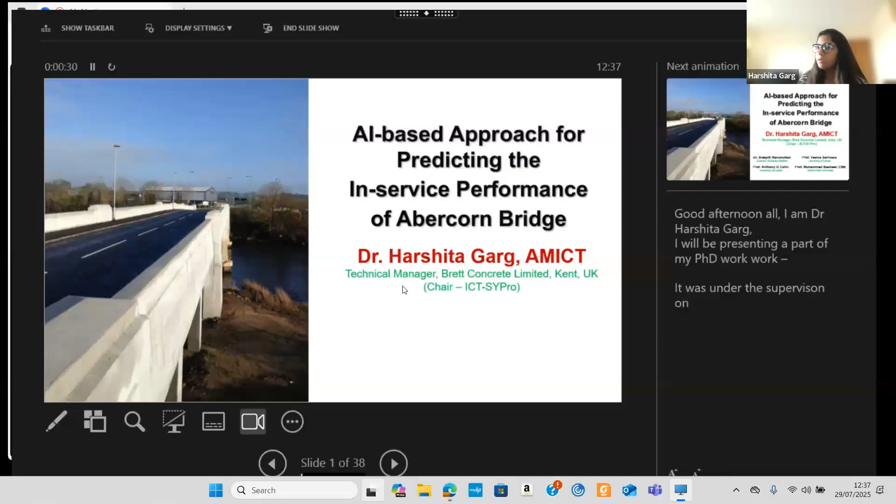My name is Dr. Harshita Garg. I'm technical manager at Brett Concrete, also the chair of ICT-SYPro, as Anita has mentioned. Today, I will be presenting a part of my PhD work, which is an automated artificial intelligence-based approach for predicting the in-service performance of Abercorn Bridge. It was under the supervision of Dr. Srijit from Queen's University Belfast, Professor Vasilis and Professor Anthony Cohn from Leeds University, and Professor Mohammad Bashir from Heriot-Watt University. Let me begin by saying that if you can predict it, you can prevent it.

And that's the rationale behind structural health monitoring. So what is actually structural health monitoring?

So it's an innovative technology that automatically senses, provides, and evaluates timely information on physical and chemical changes in materials that could allow early detection of deterioration, such as chloride-induced corrosion.

So basically, we have sensors such as electrical resistance sensors, temperature sensors, relative humidity sensors that are embedded in the concrete or concrete structures. The data from these sensors goes to the data acquisition system, which stores the data remotely on remote desktops.

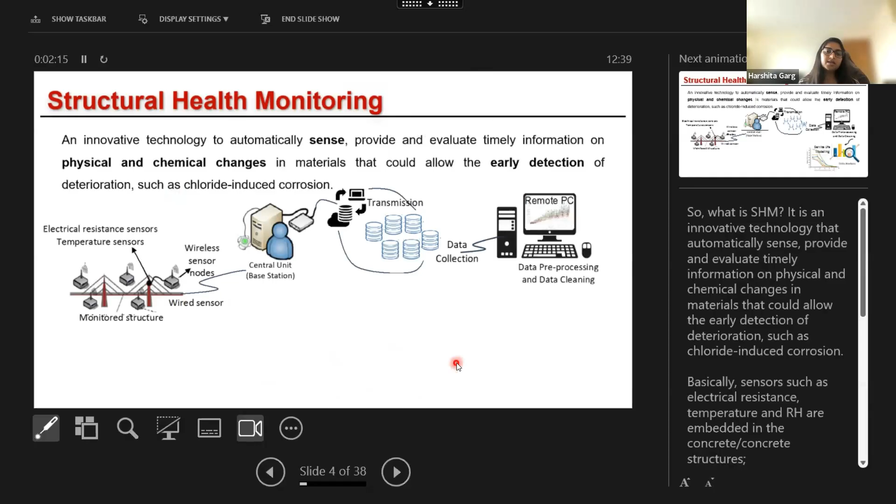And the data can be then pre-processed and cleaned for analysis. And the data analysis could provide us timely information about the faults in the structures, which can help for decision making, planning, and maintenance strategies. Therefore, it leads to real-time maintenance, increased serviceability, and improved safety of the structure and the environment.

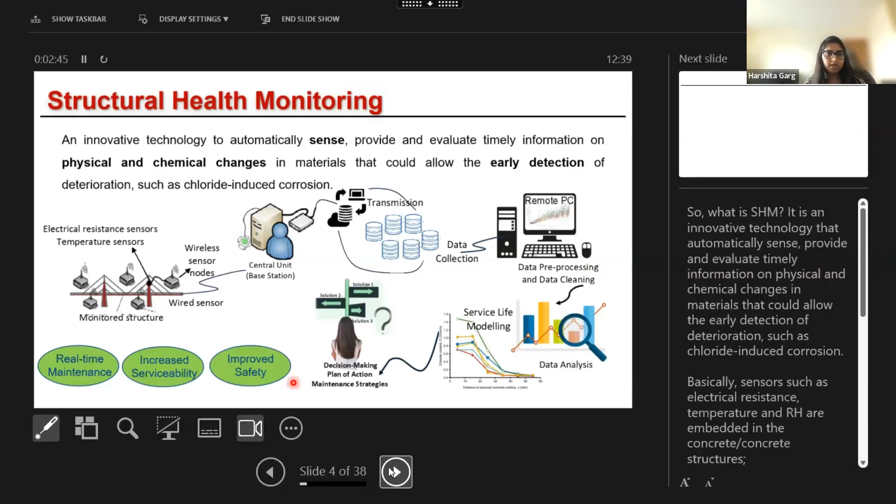While global SHM has been in use and people know about its benefits and potential applications, the local structure health monitoring for durability is still not the predominant practice in the maintenance management of structures. But why?

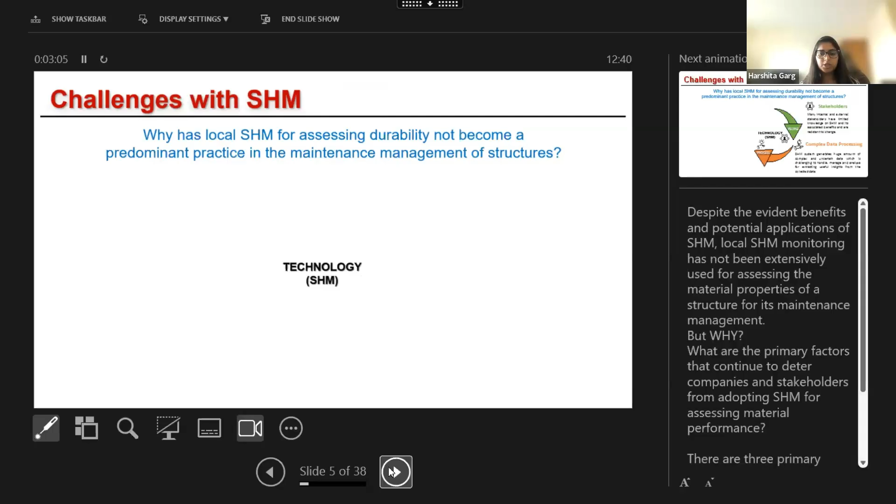What are the factors which lead companies and stakeholders to not adopt SHM? So there are three primary factors, the first of which is stakeholders. Not all stakeholders have knowledge about structure health monitoring and its associated benefits, and therefore they are reluctant to any changes.

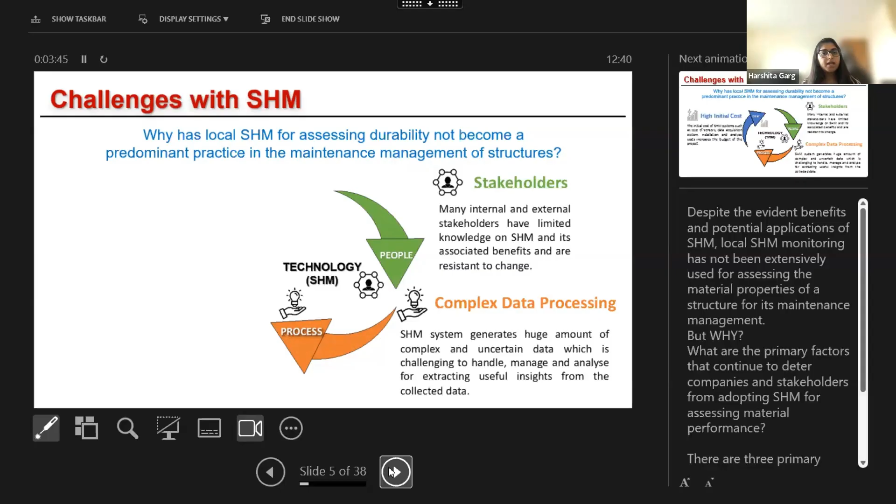Secondly, even if they know about SHM and implement those sensors in the structure, these sensors generate a huge amount of data, which is difficult to analyze and maintain, and therefore they cannot get useful information from this collected dataset. Finally, the cost of these sensors increases the overall budget of the project. So these three are the factors which prevent stakeholders from using sensors.

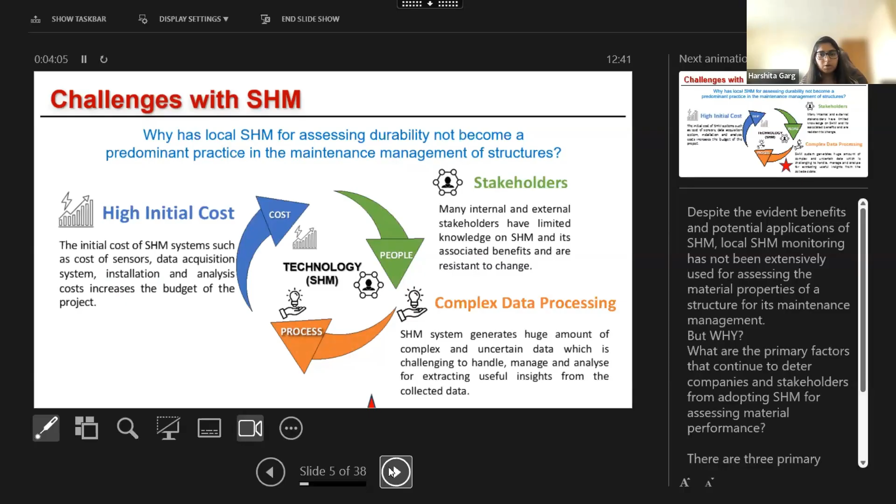In this presentation, I'm focusing on one of the topics here, which is complex data processing, which indirectly serves the other two as well: the sensor data dilemma.

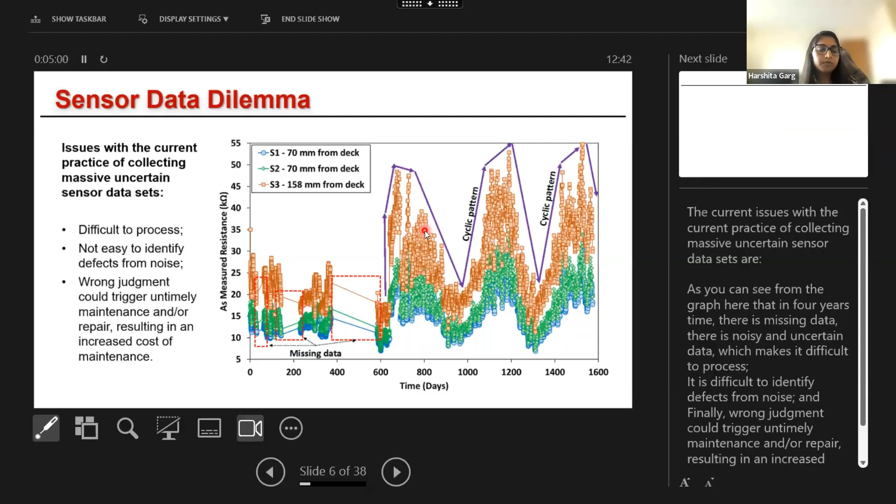This makes it difficult to process. It is also not easy to identify what are actually defects from this noise. Finally, if you derive wrong information from the dataset, that could lead to wrong judgment and therefore untimely maintenance and repairs, which could eventually increase the cost of maintenance and defeat the purpose of using the sensors. So therefore, this needs some solutions.

The three potential solutions that were identified were: first, to develop an AI-based SHM methodology that could resolve any issues related to data processing. Second, to conduct whole life cost analysis of concrete bridges with various SHM systems for durability over a specific period, and therefore eliminate any cost-related issues.

The two of these can then assist decision makers in making decisions about repairs and maintenance, and therefore eliminate any barriers preventing the widespread adoption of SHM.

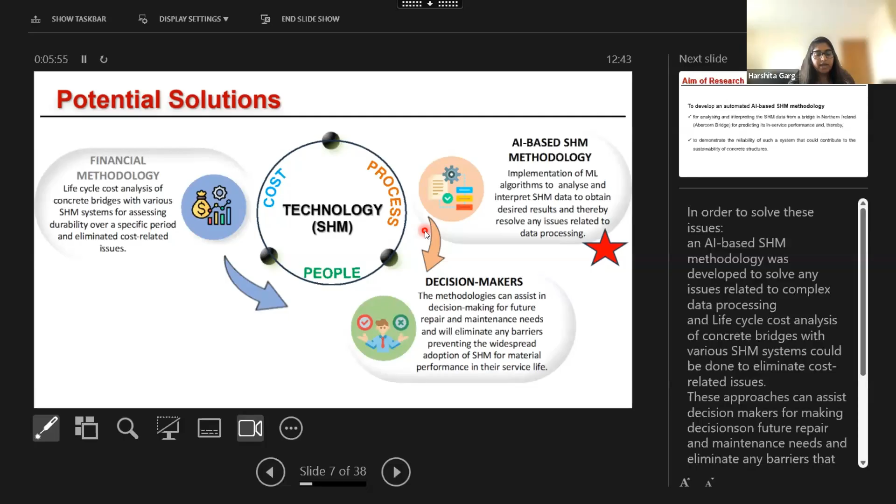So in this presentation, I will only be discussing one of the solutions, the AI-based SHM methodology that I developed. The aim of the research was to develop an automated AI-based SHM methodology for analyzing and interpreting the SHM data from a bridge in Northern Ireland, the Abercorn Bridge, for predicting its in-service performance, and therefore to demonstrate the reliability of such a system that could contribute to the sustainability of concrete structures.

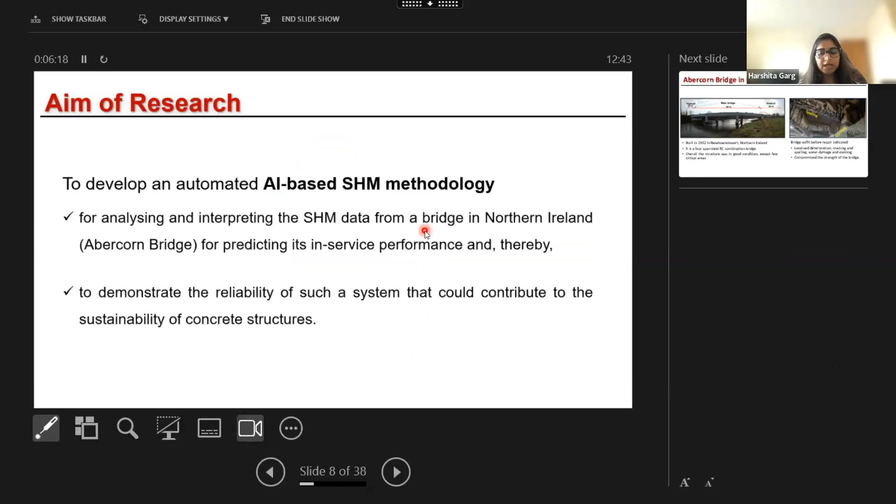Abercorn Bridge was built in 1932 in Northern Ireland. It's a four-span steel and reinforced concrete combination bridge. Overall, this bridge was in good condition, but over time, it started to show signs of localized deterioration, such as cracking and spalling of concrete, which exposed the reinforcing steel.

There was also evidence of water damage and staining from all the exposed areas, which led to compromising the strength of the bridge.

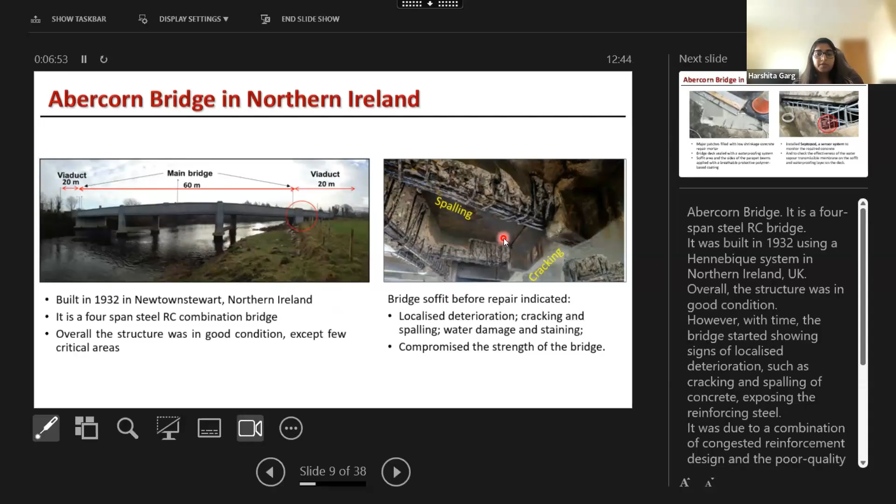So therefore, the bridge was repaired and the major patches were filled with low shrinkage concrete repair mortar. Along with that, the bridge deck was sealed with a waterproofing layer, while the soffit area and sides of the parapet beams were applied with a breathable protective polymer-based coating so that it allows moisture to evaporate.

In addition to that, during the repairs, 3 commercially available sensors called septopods, as seen here, were installed. The aim behind installing these sensors was to check the effectiveness of the water vapor transmissible membrane on the soffit and the waterproofing layer on the deck surface, and also to see the rate of chloride ingress in the concrete.

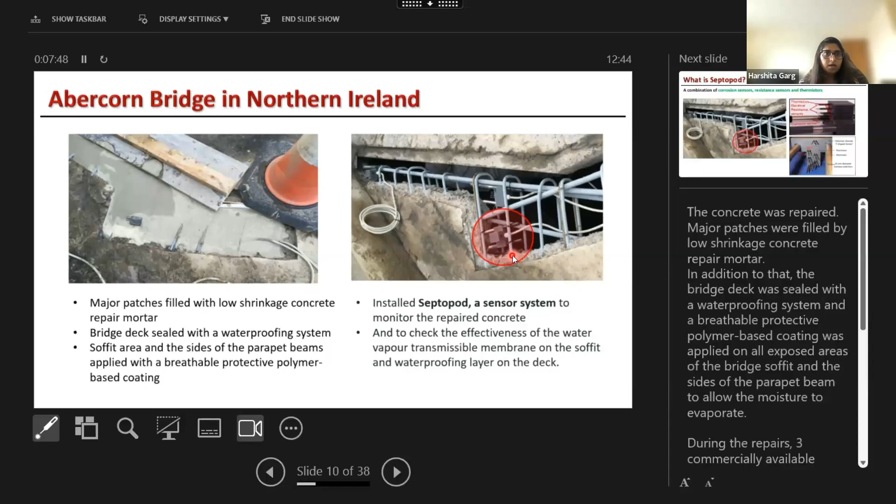So what is actually the septopod? The septopod is a combination of 3 types of sensors: corrosion sensors, resistance sensors which are electrodes, and temperature sensors which are called thermistors. The set of these 3 sensors is called a septopod.

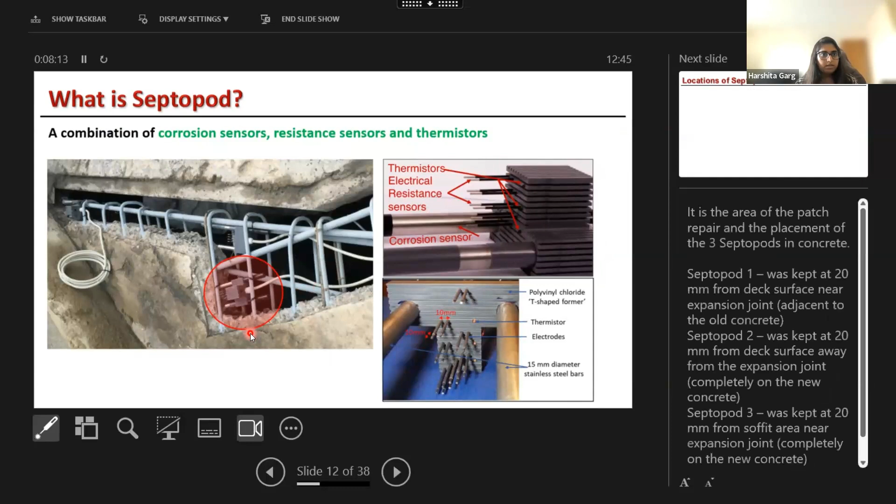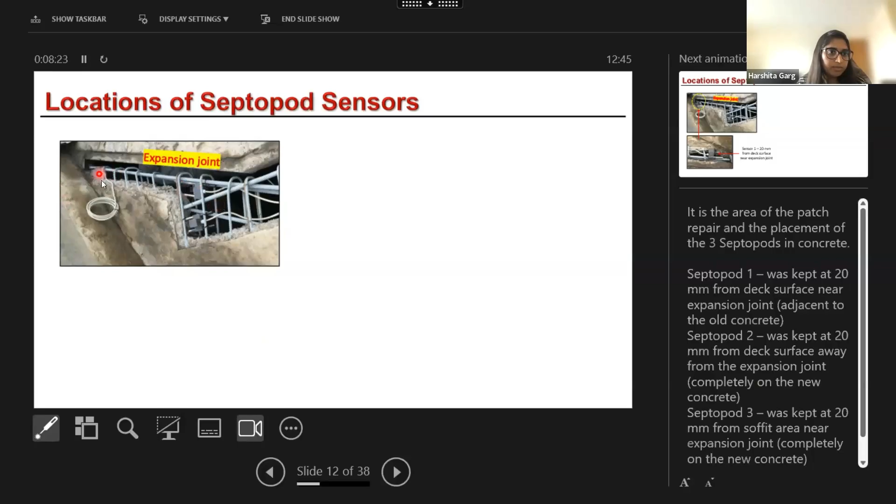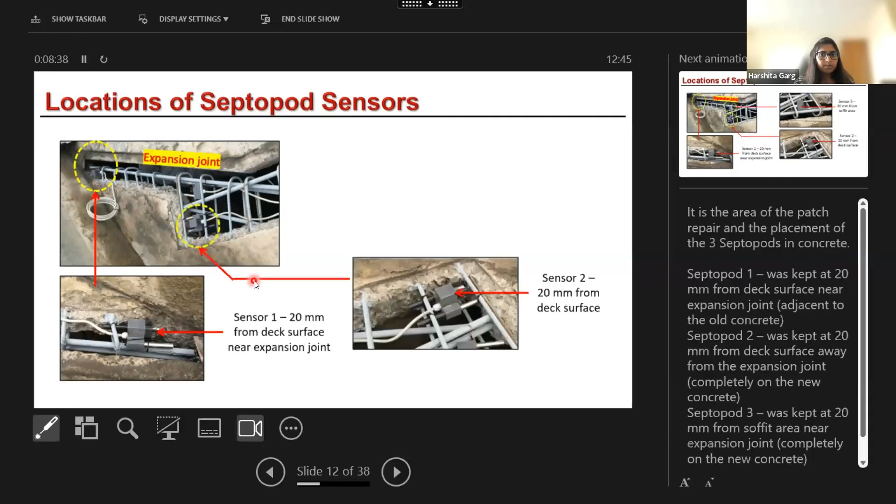These sensors were located at 3 different depths at 3 different locations in the concrete. These are the 3 septopods here. The first one was placed at 20 mm from the deck surface near the expansion joint, adjacent to the old concrete. The second one was placed near the deck surface, 20 mm from the deck surface, but away from the expansion joint. The third one was placed at 20 mm from the soffit area.

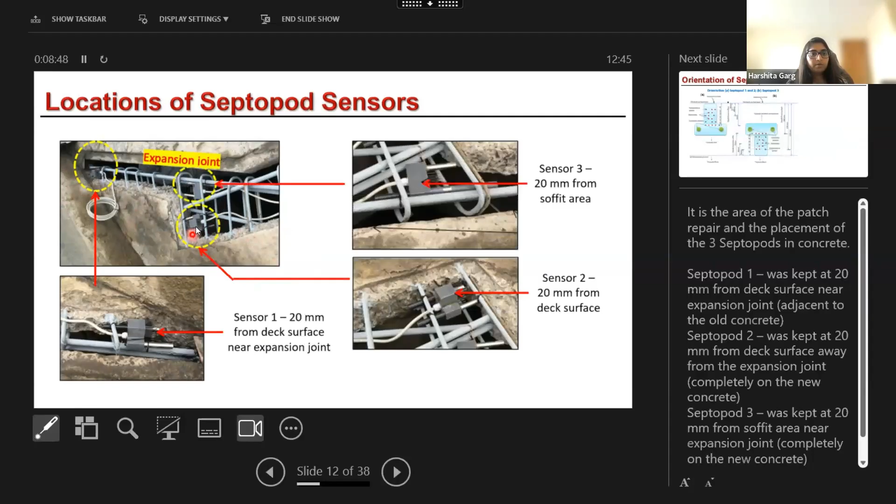The orientation of these 3 sensors: the first 2 were 20 mil from the deck surface, and the third one is 108 mil from the deck surface. Each septopod has 6 electrodes at 6 different locations and 3 temperature sensors.

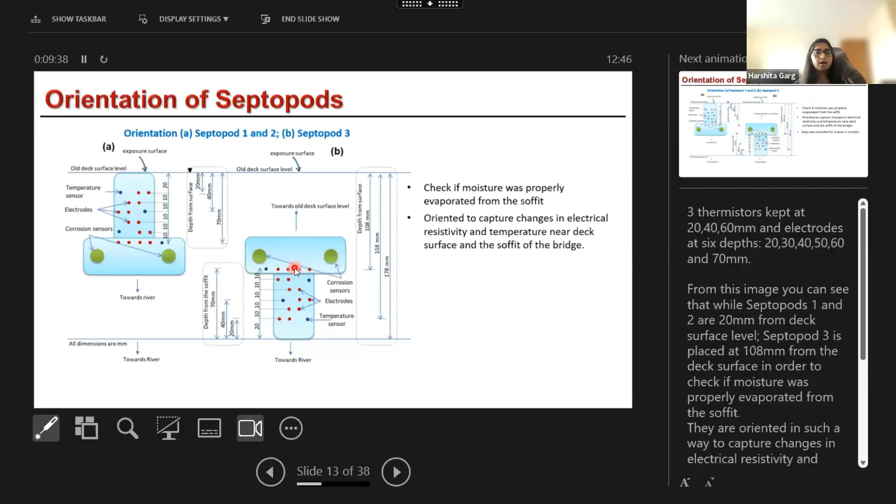The first 2 were oriented to capture changes in resistance and temperature near the deck surface and the soffit of the bridge, while the third septopod was specifically placed near the soffit to check if moisture was properly evaporating from that area. The sensors were capturing data for over 4 years.

We were collecting data every 2 hours for the first 20 months. For the remaining 30 months, data was collected twice a day, at 12 a.m. and 12 p.m., every day.

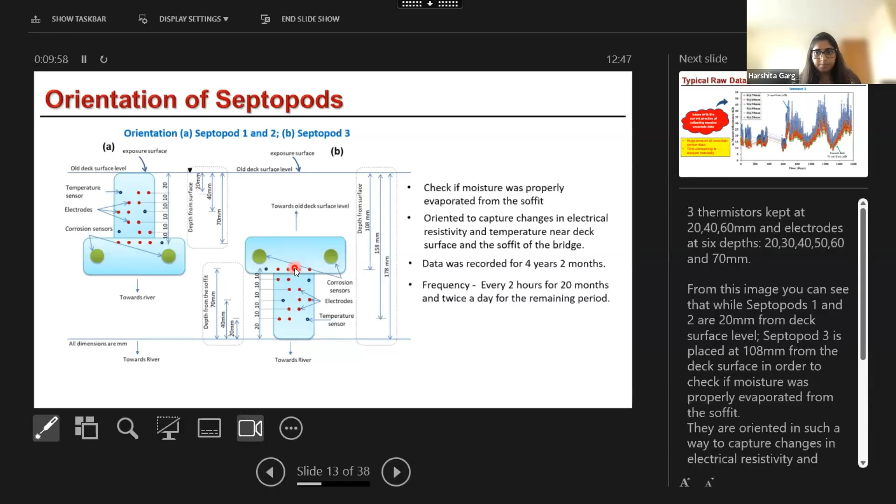So this is the original data that we got, the raw typical data of electrical resistance. You can see there is missing data, the single lines, and here the data is going up and down. There's uncertainty in the data.

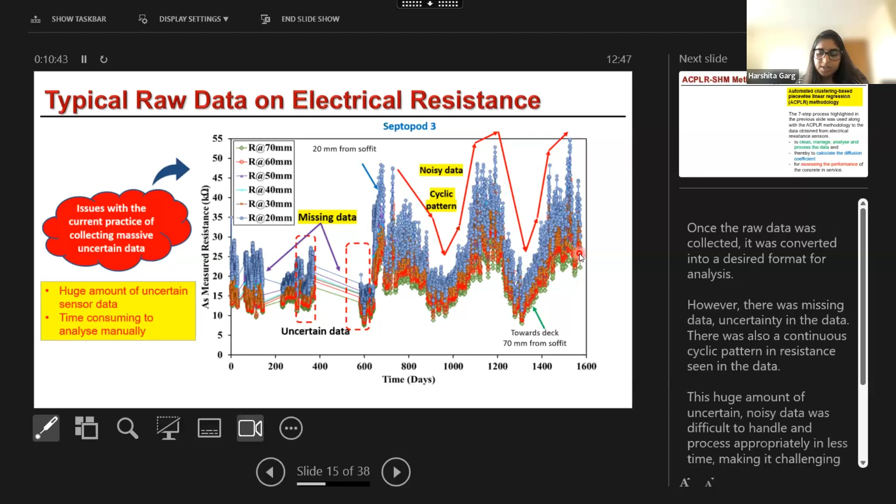There's cyclic patterns, and the data itself is huge, making it difficult and time consuming to manually analyze. All this led to the use of algorithms which could help process it easily and efficiently.

To analyze this data, an automated clustering-based linear regression was used. It is an amalgamation of two algorithms. This methodology combines two types of algorithms: one is unsupervised learning called clustering, and the second is regression called segmented regression.

This methodology is a 7-step process. The first step is to collect all the sensor data from resistance, temperature, and ambient conditions. The second is to clean the data, pre-process it, reduce noise, and identify missing information - basically identify all the general trends in the data.

The third step is to quantitatively analyze the data using two algorithms called k-means clustering and segmented regression. The results from these two algorithms could be used to calculate the diffusion coefficient, which is enough to assess the performance of concrete structures. It can also be used in any service life model like Duracrete, Life 365, or ClinConc to predict the remaining service life of the concrete.

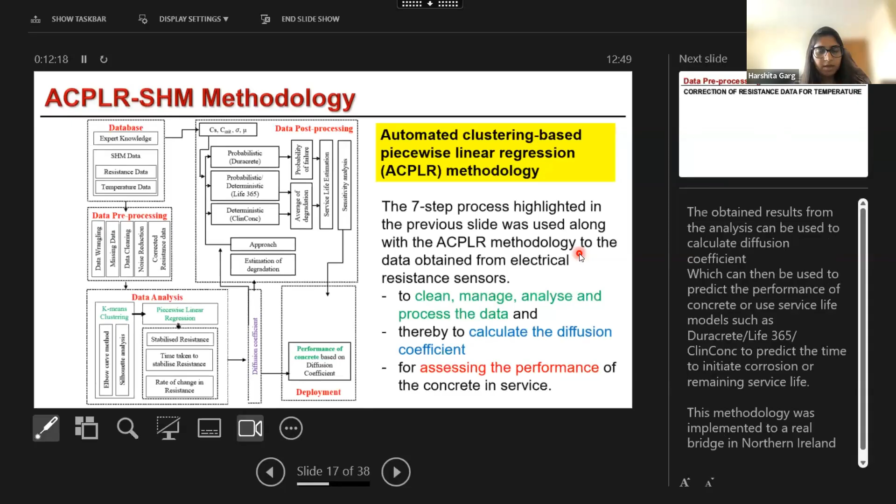I will now discuss all these steps using the sensor data we got from the Abercorn bridge. The next step was to pre-process the data, and as we can see, there was huge cyclic variation in the 4 years of data.

This is mostly because resistance measurements are directly affected by environmental conditions. Here you can see that with an increase in temperature, there's a sudden drop in resistance. Due to this, an Arrhenius relationship was used, which reduces the influence of temperature on electrical resistance and standardizes it to 25 degrees Celsius.

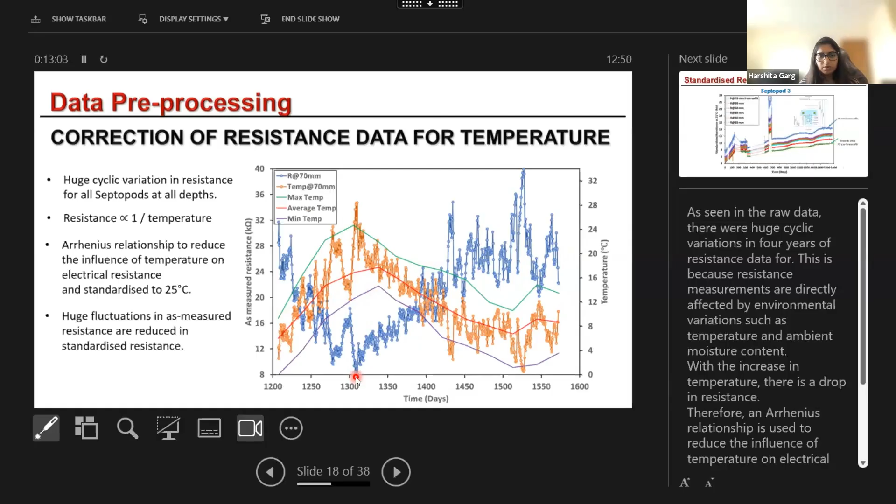Now the huge variations we saw in the previous slide are reduced, and this can be seen in Septopod 3. Those huge variations are now showing that the resistance is overall increasing rather than such varied sensor data.

Even though the resistance data is increasing overall, there is some variation - the resistance was increasing, then suddenly there was a drop. This drop was identified from the sensor data, and on visual inspection it was identified that there was leakage in the structure, in the newly repaired concrete near the expansion joint. This repair was done soon after identification, and after that we can see the resistance started to increase again. Even though there is some missing information, we can see resistance was overall increasing.

Then there was a sudden increase in resistance, the reason for which is still unknown, but there were two major possibilities identified. First, during this time there was a change in the frequency of data collection - from every 2 hours to twice a day - which could have messed up the system, giving inappropriate results. Also, local areas nearby on the bridge were heated up to get rid of excess moisture, which could also have led to an increase in resistance, but the actual reason was unknown.

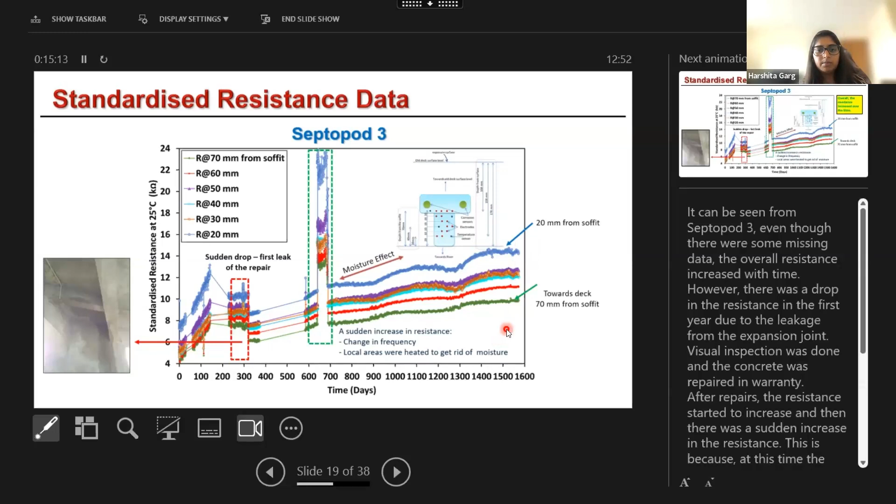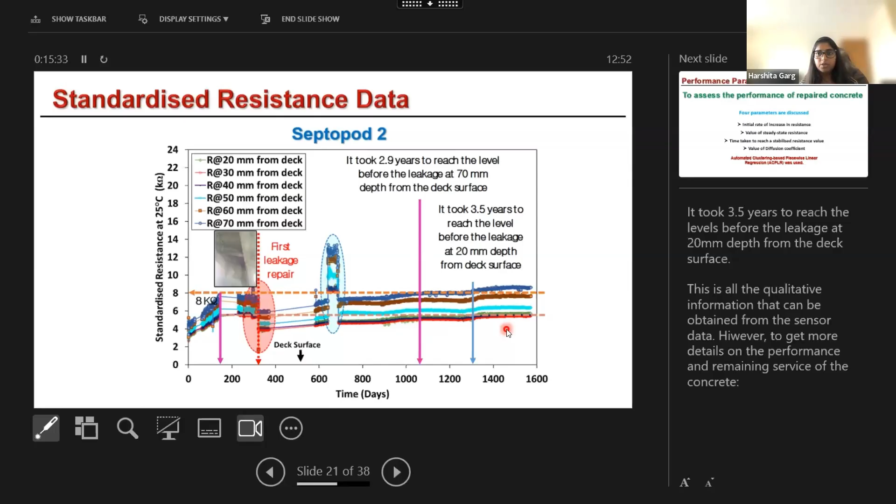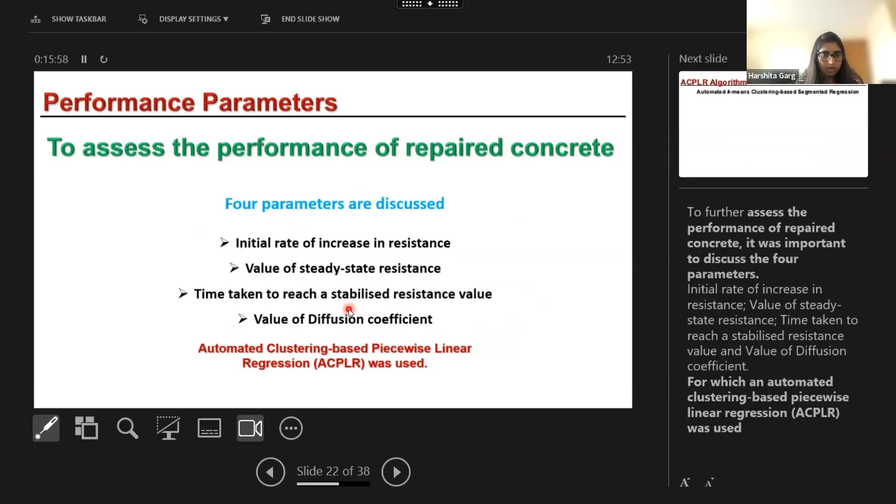This is all the information we can get from pre-processing the data, which is qualitative. Similar data was obtained from Septopod 1 and Septopod 2. But in order to get further information about the performance of concrete and remaining service life, we need to quantitatively analyze this data, for which we need 4 different parameters: initial rate of increase in resistance, value of steady state resistance, time taken to reach the steady state resistance value, and finally the value of diffusion coefficient. All these 4 parameters can help assess the performance of repaired concrete, using an AI-based algorithm called automated clustering-based piecewise linear regression.

I'm going to discuss this algorithm on one of the data sets we got from the sensors. Since the resistance data was overall increasing, I took the continuous data set after 650 days, after 2 disparities we found, because this was the continuous data for the next remaining 2 years. So this is the data at 70 mil from the soffit area.

Here we have the variable standardized resistance. If you look at the data set here, it looks like the data is divided into around 5 clusters, or 4 breakpoints. It can be seen here - it is divided into 5 clusters or 4 breakpoints.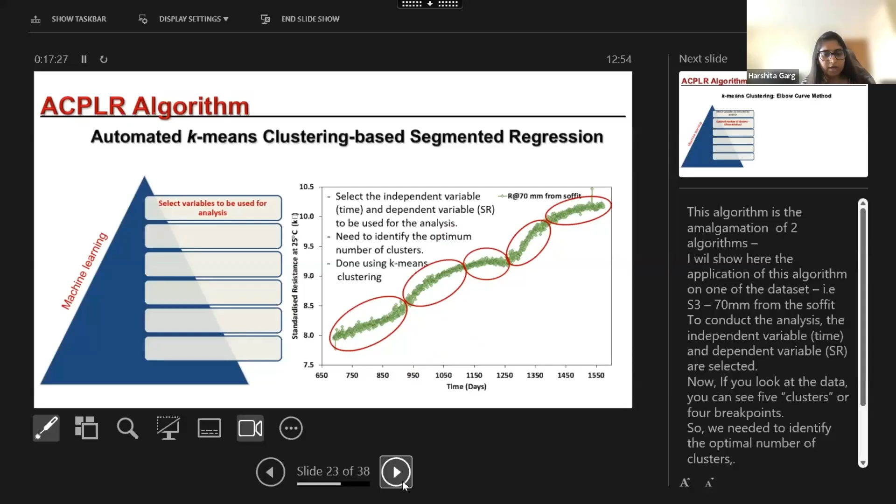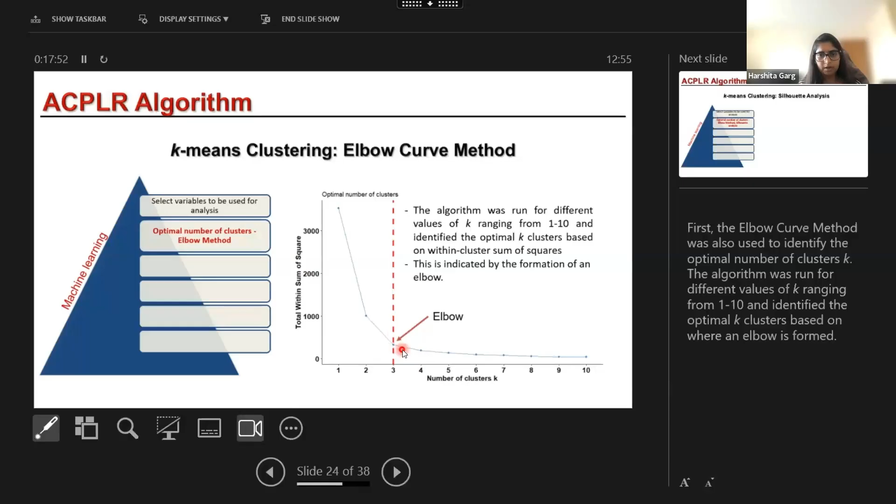But how do we know at what location these clusters are, or how many of these clusters are optimal? To find that, we use the k-means clustering algorithm, which has a method called the elbow curve method that identifies the optimal number of clusters. The algorithm runs for different values of k from 1 to 10, and based on within-cluster sum of squares, it identifies the value of k clusters. Where there is an elbow formed, as seen here, it shows the optimal number of clusters - so there are 3 clusters.

Now, to cross validate it, we use a second method of clustering called silhouette analysis. This method identifies how similar a data point is within the cluster compared with other clusters, and how well each data point fits into the assigned cluster. Based on this, the highest silhouette coefficient is considered as the number of clusters required. Keep in mind, it's not the correct number of clusters - it is only the optimal number, not the exact number that could be identified.

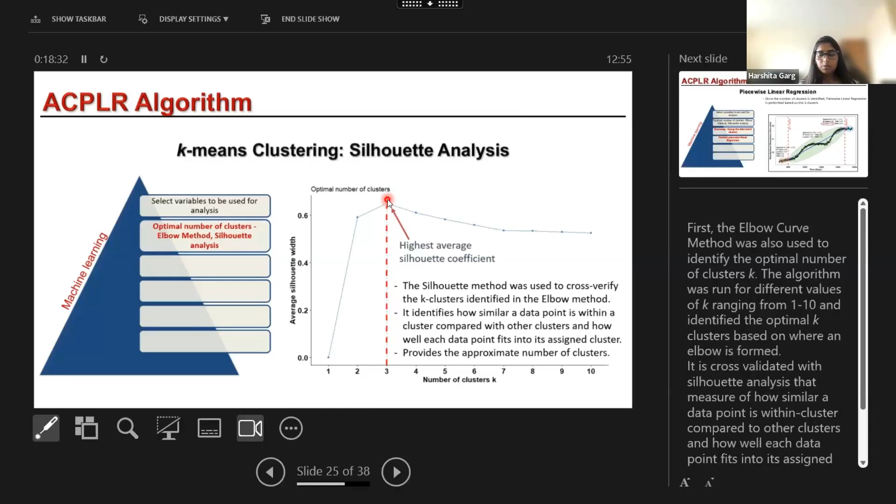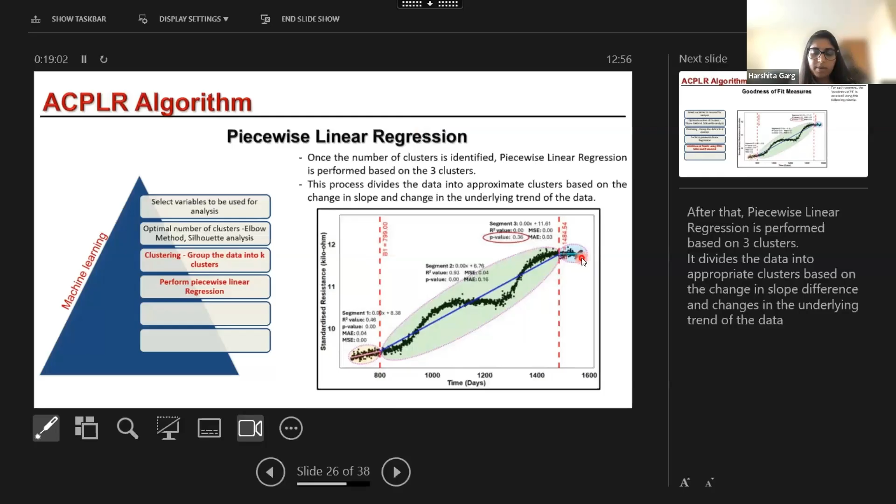So the next step is to run the algorithm with clustering and piecewise linear regression. It identifies 3 different clusters at 3 locations, dividing the data based on a change in the slope and change in the underlying trend of the data. Here we can see it provided 3 clusters, but this doesn't seem to look correct by looking at the data. So there is a need to put a statistical method in place and adjust some criteria - if it passes those 4 or 5 criteria, then the clustering results are okay.

The 4 criteria that were set: first, if the R squared value is greater than 0 for all the segments. Second, the P value is less than 0.05, meaning time has a significant impact on the resistance. Third, the mean squared error and mean absolute error values are closer to 0, signifying higher accuracy for the segments identified. The last criteria is that these 2 values, MSE and MAE, have no significant difference.

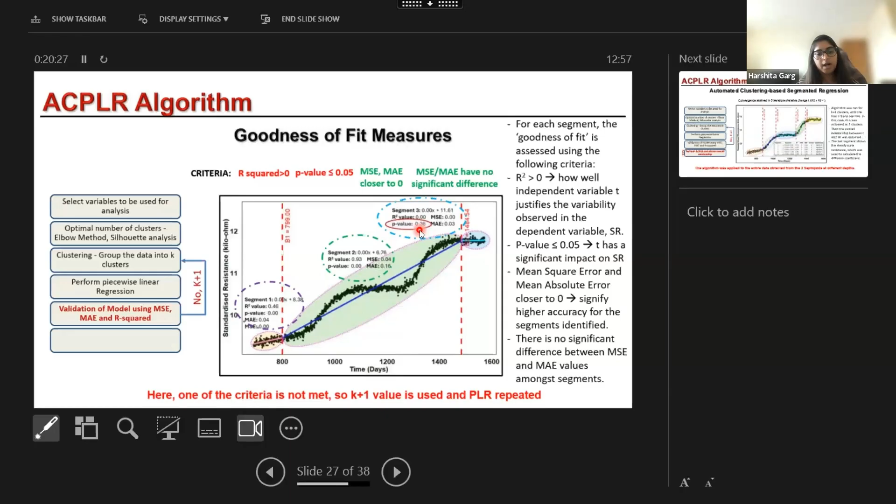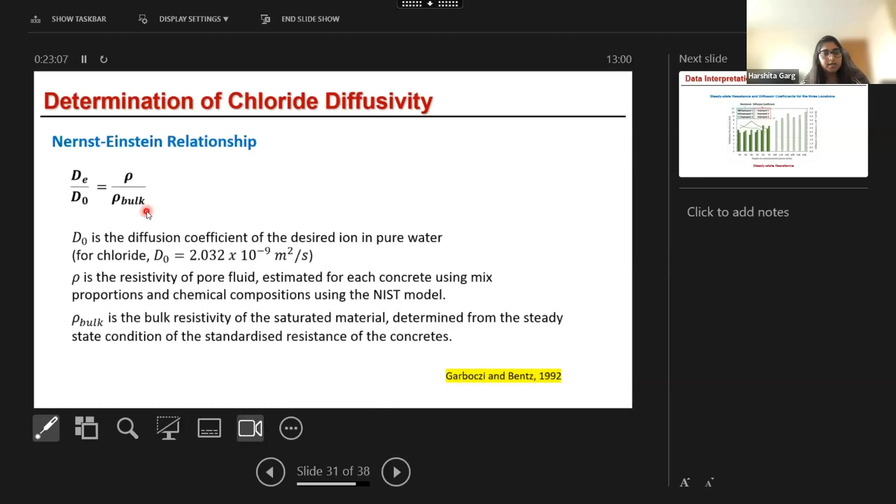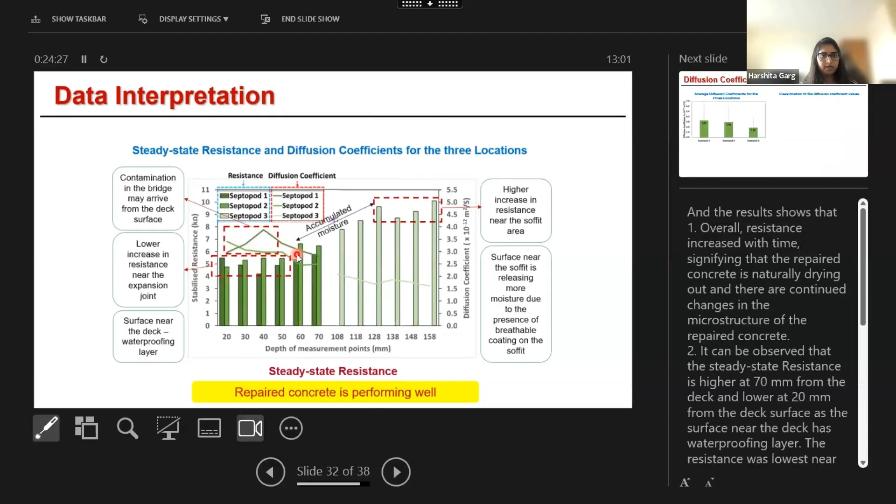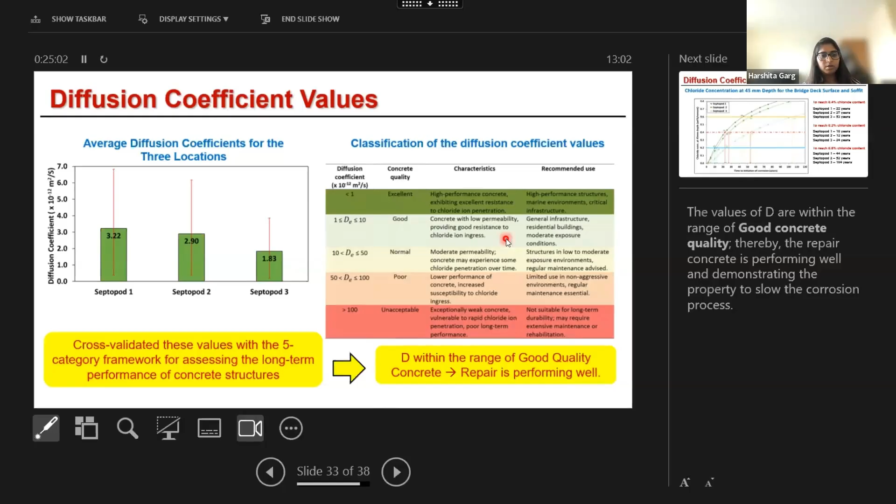Now, these values can be used in any service life model for service life prediction. Here I have used this in Duracrete modeling to predict the time taken to initiate corrosion.

Now, chloride concentration at 45 mm depth for the bridge deck surface and soffit can be seen here at 3 different points: 0.2 as the minimum chloride content, 0.4 as average chloride content, and 0.6 as the highest chloride content it can reach. Considering 0.4 chloride content, it would take around 22 to 27 years for sensors 1 and 2 near the deck surface, and around 53 years near the soffit area.

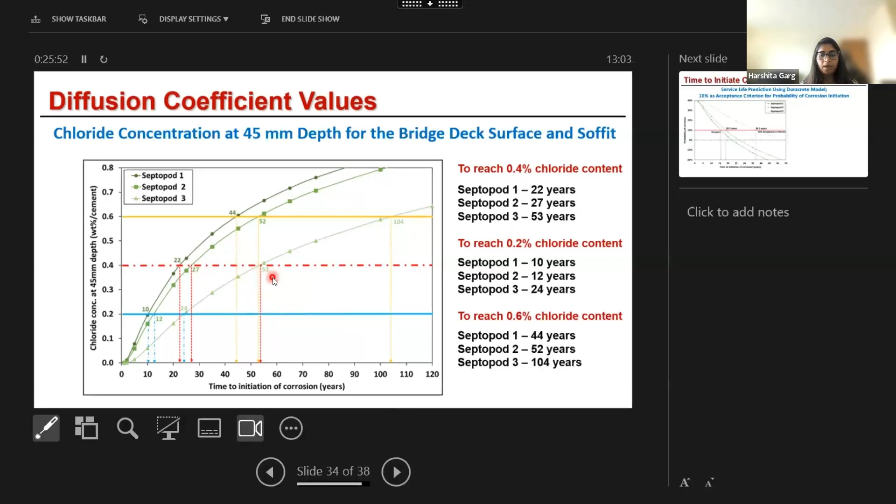Now, if we consider 10% as the acceptance criteria for probability of corrosion initiation, we can see that it can take around 16 to 18 years for chloride initiation near the deck surface, and around 36.5 years near the soffit area. So the expected service life of this concrete...

The concrete was designed for 25 years to reduce refurbishment cost. Now, the remaining service life that we predicted matched closely with the design service life provided by the engineers, knowing that the bridge has already been in use for over 4.5 years.

So the remaining service life was predicted quite closely, which shows a high degree of accuracy and reliability of the model compared to human predictions.

It also identified that the repaired concrete near the deck would experience chloride ingress sooner than the bridge soffit, due to additional salt spray on the deck surface. And finally, the chlorides may start to enter near the expansion joint near the deck surface first.

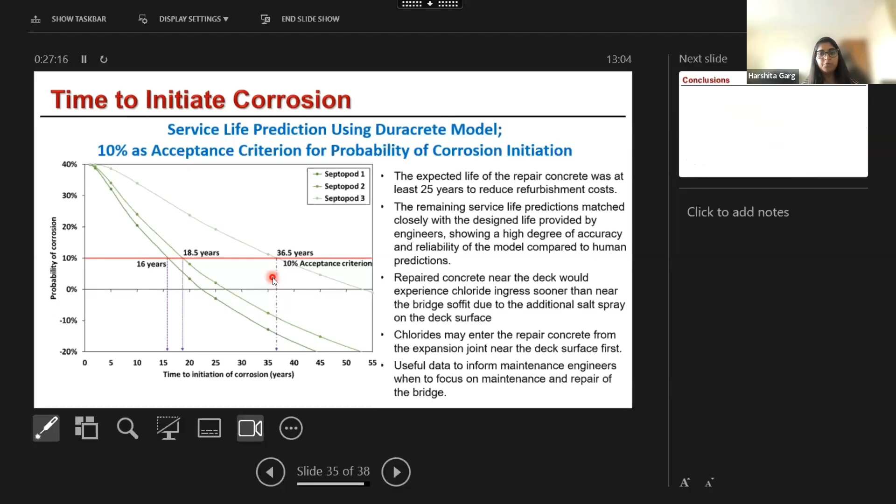So all this information is quite useful to inform maintenance engineers when to focus on maintenance and repairs of the bridge. So finally, conclusions.

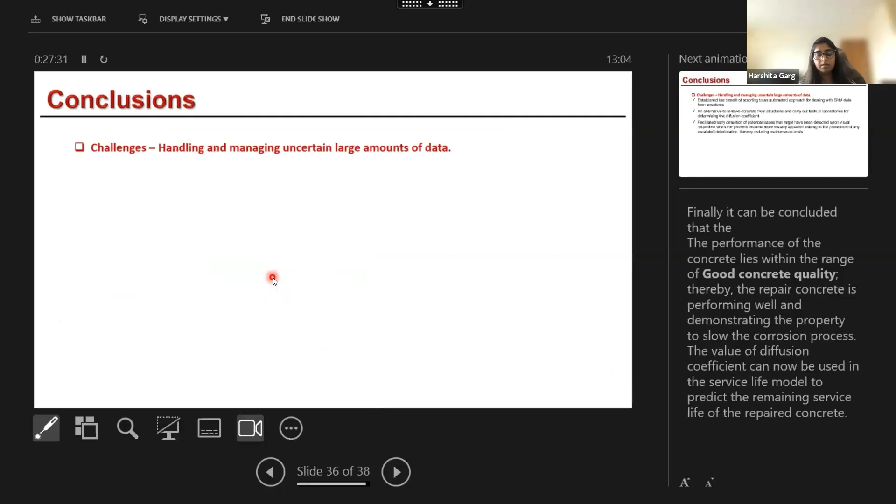There are challenges that we understood from the sensor data, that it was difficult to handle and manage, and there was uncertainty in dealing with these large amounts of data sets. So that's why we established this algorithm, and we see the benefit of resorting to an automated approach for dealing with SHM data from structures.

This approach is an alternative to us doing non-destructive and destructive tests by removing concrete from the structures and carrying out those tests in labs and on site for determining the diffusion coefficient values.

Further, we also understood that in the initial years, there was leakage in the concrete, which was new concrete, and that was detected at a very early stage due to the help of sensors and data analysis. Unless we had SHM embedded, those issues would not have been detected until the problem became more visually apparent, preventing escalated deterioration.

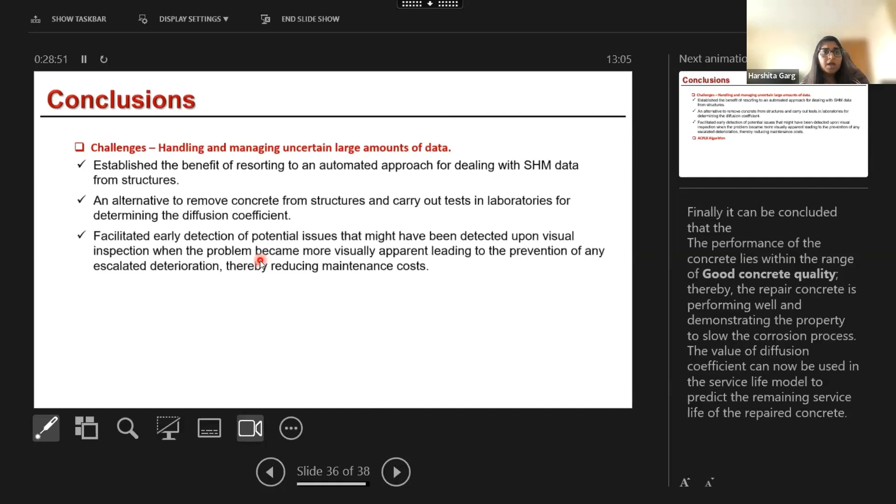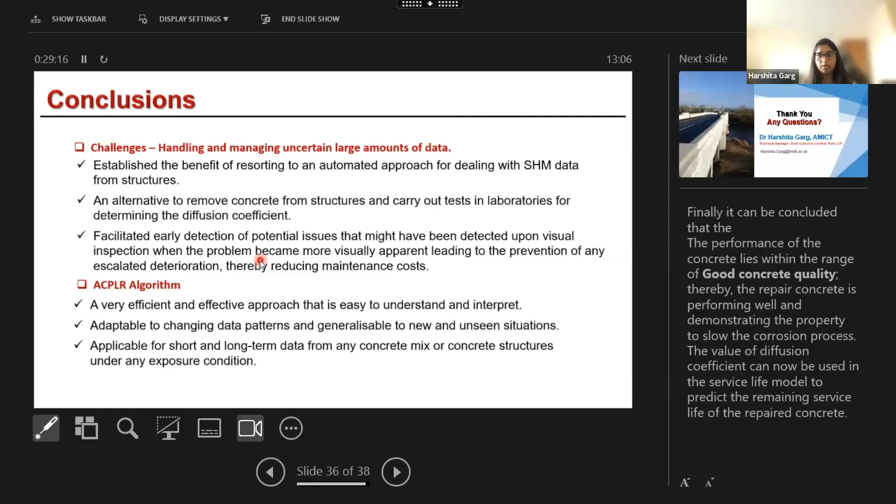Therefore, we reduced increasing maintenance costs with the use of SHM. Finally, the algorithm that we developed is quite an efficient and effective approach. It is easy to understand and interpret, adaptable to changes in data patterns, and generalizable to new and unseen situations. Finally, it is applicable for short and long-term data from any concrete mix or concrete structures under any exposure conditions. Thank you.

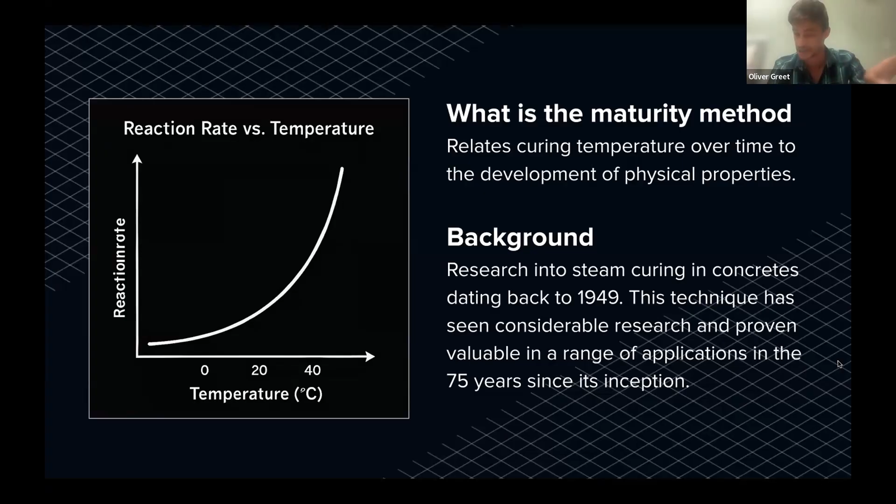So the focus of what I'll talk about today is called the maturity method. The maturity method is a technique that dates back to research going on over 70 years ago. The first paper was published in 1949, looking at how the temperature of concrete affects the rate of curing. As with any chemical reaction, the rate at which that reaction proceeds is related to the actual temperature of the system itself. The research into this began while researchers were looking into steam curing techniques in concrete back in the 50s, and they needed better methods than the existing techniques to understand the strength gain of those materials subjected to different thermal environments.

So early researchers introduced this term, temperature time factor. Essentially, this is just a value that relates to how progressed the hydration reaction is within the concrete itself. And they published a very simple function to help us understand that.

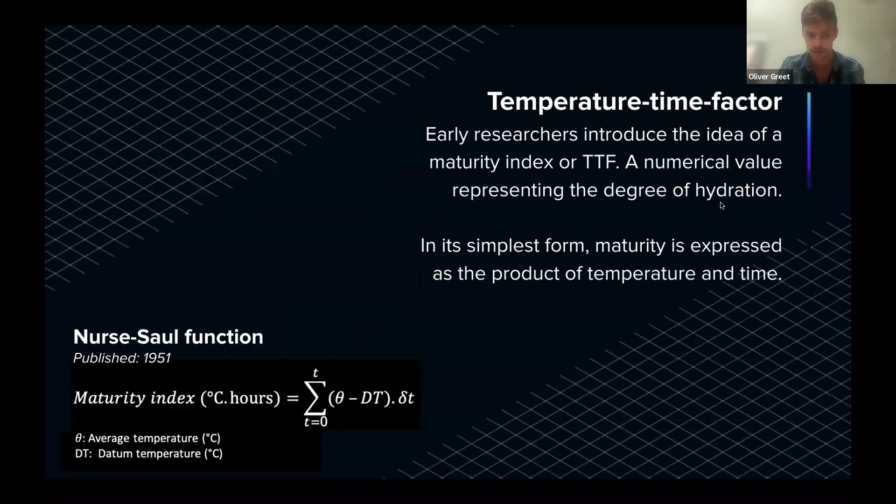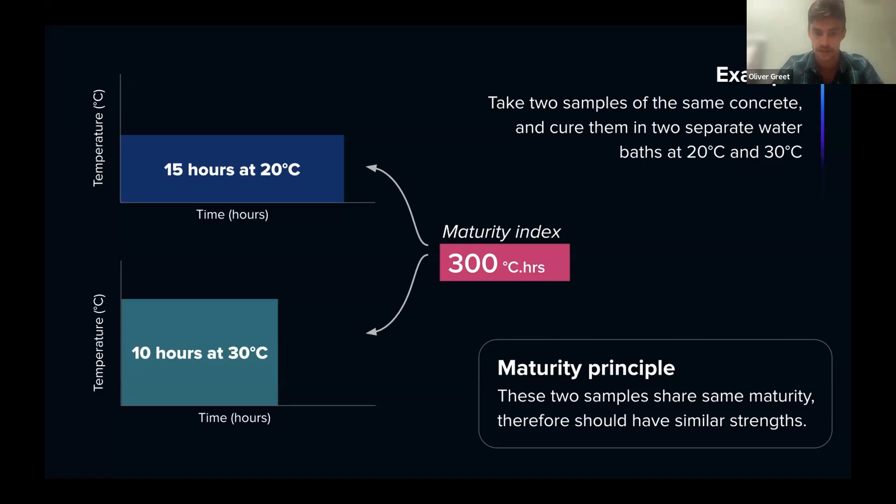What this unlocks is the ability to actually take account of varied temperature conditions as the concrete matures, and also to predict how different thermal environments will influence the rate of reaction.

Again, as the research went on, that was in 1951. A second function was published in 1977. Actually, Harshita referenced the same guy, Arrhenius. He was actually a 19th century chemist, so he didn't publish this function, but it was named after him as he published one of the original functions in pure chemistry, looking at reaction rates and how kinetics affect those reaction rates.

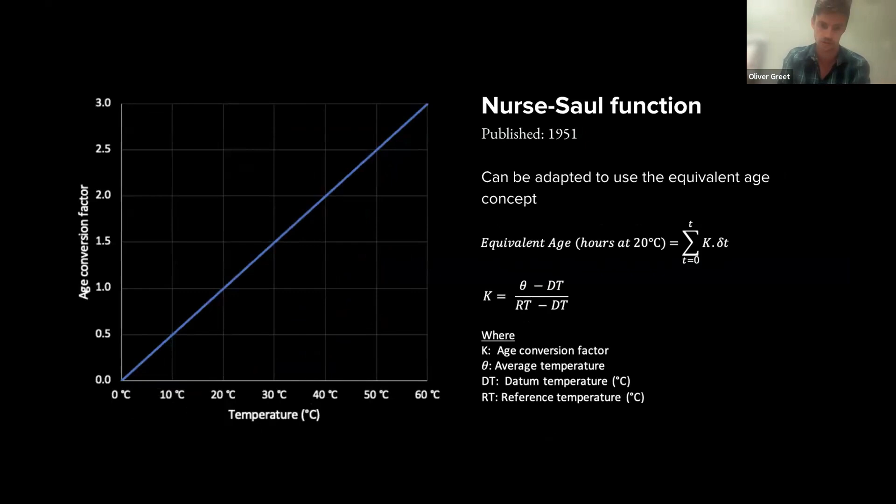So what you can see here is this function is considered superior to the first one. It addresses one of the main issues, which is that actually in practice, the linear rate of reaction, or the suggestion that the rate of reaction is linear with respect to temperature - i.e. it doubles between 20 and 40 and would therefore double again at 80 - doesn't actually hold entirely true for many concretes. This function is still in broad use today, but it allows you to adapt it for different chemistries. Particularly with the use of ground granulated blast furnace slag, or GGBS, today the actual influence is that it increases the sensitivity to temperature. This means as we elevate the temperature, we get a disproportionate increase versus a Portland cement concrete, and conversely, at lower temperatures, which we're more familiar with in the UK, you see a reduction in the rate of strength gain.

This most commonly in the UK manifests itself when we're curing in cold weather conditions, with high GGBS concrete slowing down more than a Portland cement concrete. It's not broadly known, but conversely, when you move up the temperature scale, you get this massive elevation in temperature with use of high GGBS concretes as well. It's a phenomena of concrete technology that many people aren't fully aware of, that we can quantify exactly how much faster or slower high replacement mixes will be.

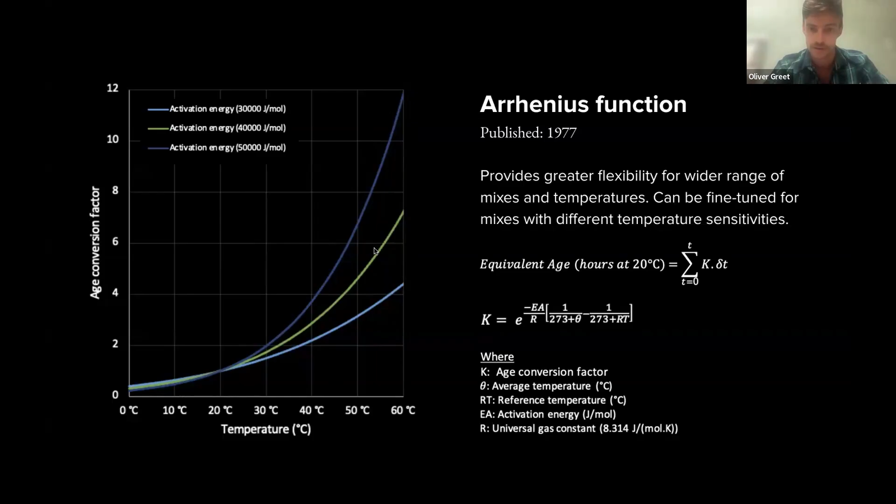That particularly does lend itself, with their increasing use today, to these techniques. Using this information, i.e. the rate of reaction, we need to couple that with some other information in order to obtain the in situ strength, which is really what most of our users are concerned with. They want to understand how strong their concrete is within the structure itself.

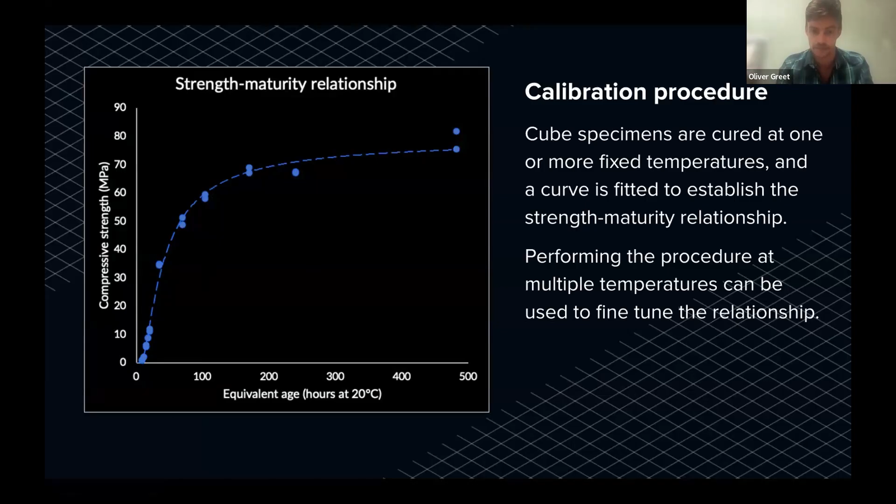So in order to do that, there is a calibration process. Essentially, the relationship between the maturity and the strength is going to be distinct for every different mix. This can be determined by casting some samples and curing those in standard conditions. You get a curve, as you can see here, and this, coupled with the information I just ran through, can be used to develop predictions of the in situ strength condition itself.

Just a quick note here on the maturity method versus traditional test methods. Traditional test methods - we use cubes in the UK, cylinders are used in Europe and much of the rest of the world - it's a really useful technique, and I don't like to speak ill of it at all. It's obviously essential for proving long-term strength, and most specifiers are going to specify concrete according to its cube strength, cured in standard conditions.

This is particularly useful when we're in the production of concrete, when we're establishing or assessing how the strength gain of concrete varies over time, perhaps due to material variation. That should give you the same answer year round, really. You want to understand how these materials combined behave in standard conditions.

But for the contractor on site, it's not entirely useful in terms of understanding how the concrete within the element itself is gaining strength, particularly in extreme seasonal environments. So it should give you a good indication of the strength potential of the concrete, but not actually tell you how strong the concrete within your structure is.

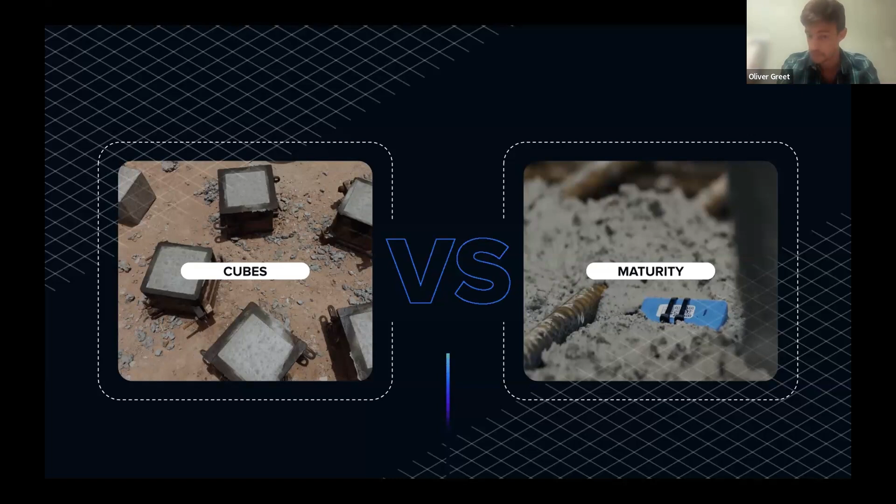That's where the maturity method tends to come into play, and it's generally used by contractors who are looking to perform activities at early strength, at low values of strength, which are considered really time critical for the project. Examples include removal of formwork, application of post-tensioning, or in precast factories, the lifting of concrete or removal of those molds. These are all really time critical and will affect the overall delivery time of the project. That's where we tend to see the maturity method being used.

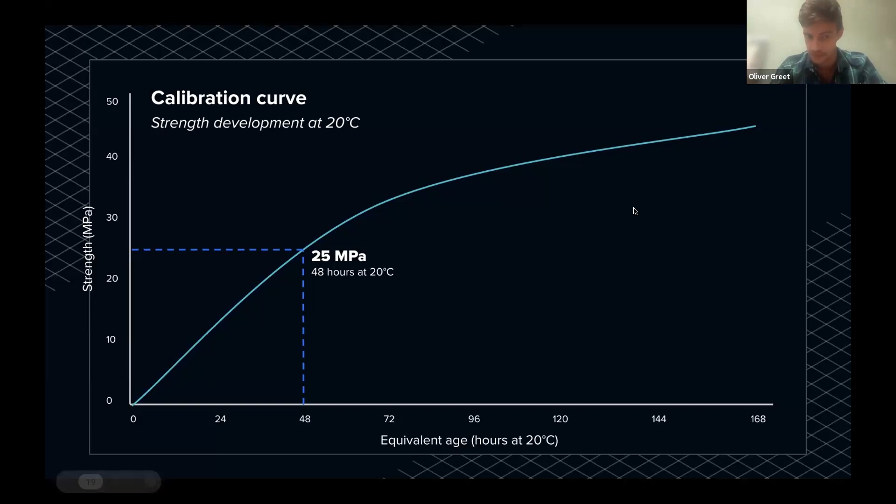Now, coupled with sensors being cast in situ, we can place those into the element itself and see how warm or cool the element is, which is really going to be dependent on how thick the element is, as well as the seasonality, so the effect of ambient temperature conditions. We know, using that temperature information, how fast or slow the concrete is actually moving along its calibrated curve, and when we're going to obtain that 25 megapascals.

I'll take now a winter case. We're pouring concrete at a temperature of 7 degrees Celsius, and as a result, it doesn't give off quite as much heat, and it never quite goes over its 20 degrees Celsius threshold at which we're curing our standard condition cubes.

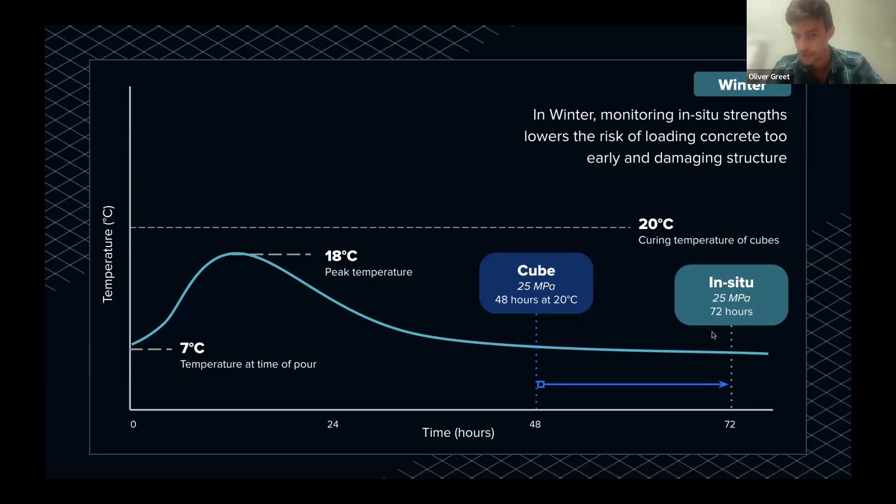In this case, the cubes will continue to obtain 25 megapascals at 48 hours, but this is actually a slightly artificially accelerated picture of the true strength development. The in-situ concrete, which is slightly cooler, is going to take longer, and as a result, that's going to take 72 hours. So this gives you an understanding of the summer and winter cases and the merits of using sensor-based monitoring to track strength gain in each condition.

Ultimately, the cubes themselves are going to give a slightly incorrect picture of how the concrete is gaining strength, and that's particularly relevant in these first 24, 48, 72 hours, while we see a lot of that thermal activity from the concrete itself.

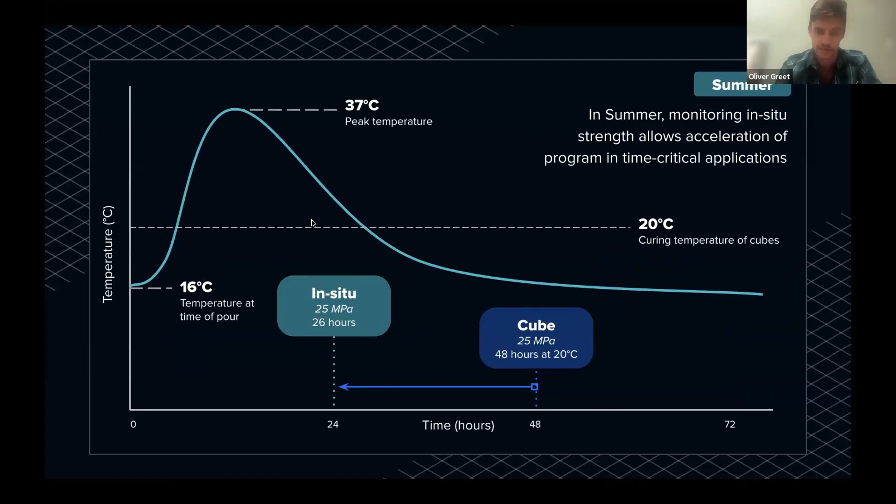This really highlights why contractors in particular see merit in using sensors to track strength gain in time-sensitive elements. It can be a question of accelerating their productivity on site, where they want to take account of the fact that the in-situ concrete is actually curing much faster than traditional tests might suggest.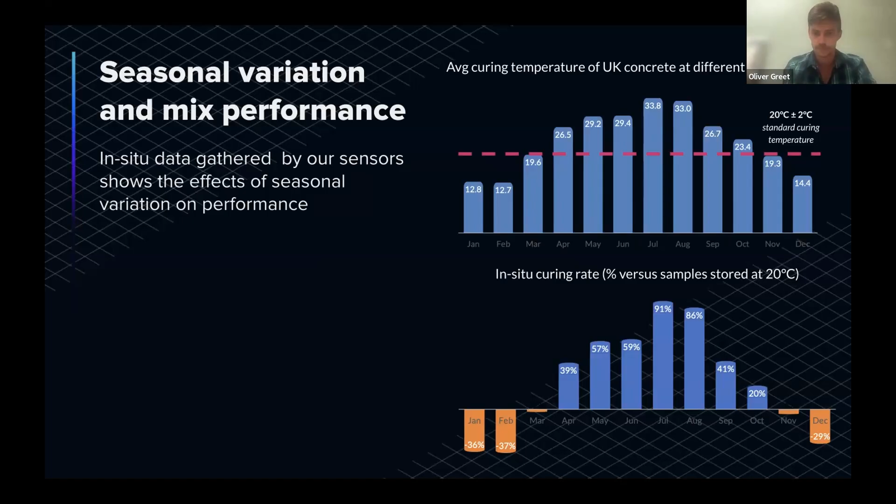The maturity method is standardized in an American standard. This is where it's largely been used over the last few decades, and that covers things like the functions I've talked through, the use of calibration, system requirements, and so on. That's called ASTM C1074, and we largely reference this standard. It's the de facto standard used around the world when using the maturity method.

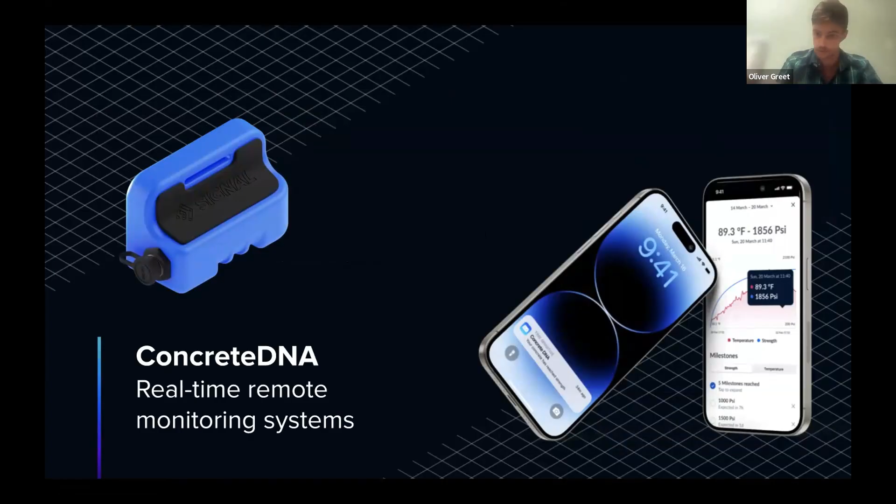Our system itself is a sensor system. Sensors are placed within the concrete elements. They track the thermal condition, and that's transmitted to the cloud, where it's all converted to the strength of the concrete itself, and that can be accessed on a smartphone or on a computer from the web platform. There you can take a look at the in-situ condition of the material itself over time.

You can see here a pour that's taken place and the thermal development on that pour, as well as the blue curve, which represents the strength gain. Contractors will specify key strengths or milestones which they're concerned with, and the system tracks those.

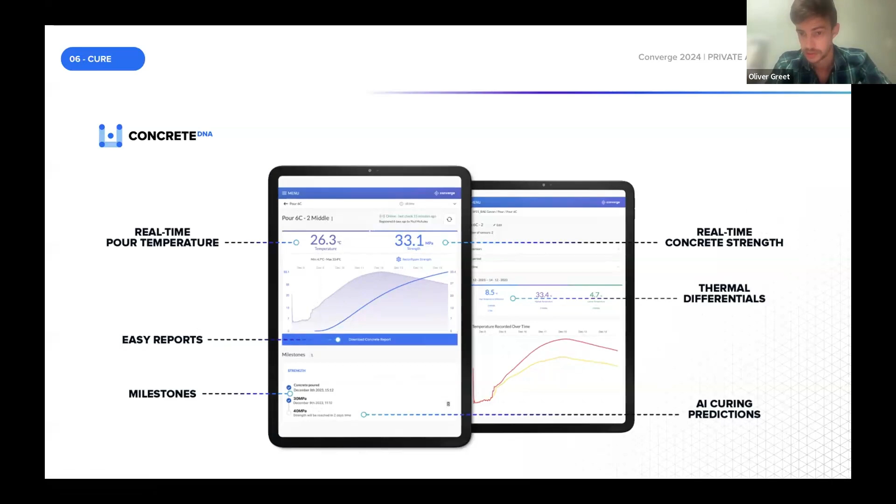We can also use it for tracking thermal temperature differentials. This is a common use case for raft concrete slabs and any other mass concrete applications, where the thermal differentials are usually specified. You can use the system to track the concrete in various locations. We have a couple of flavors of our hardware.

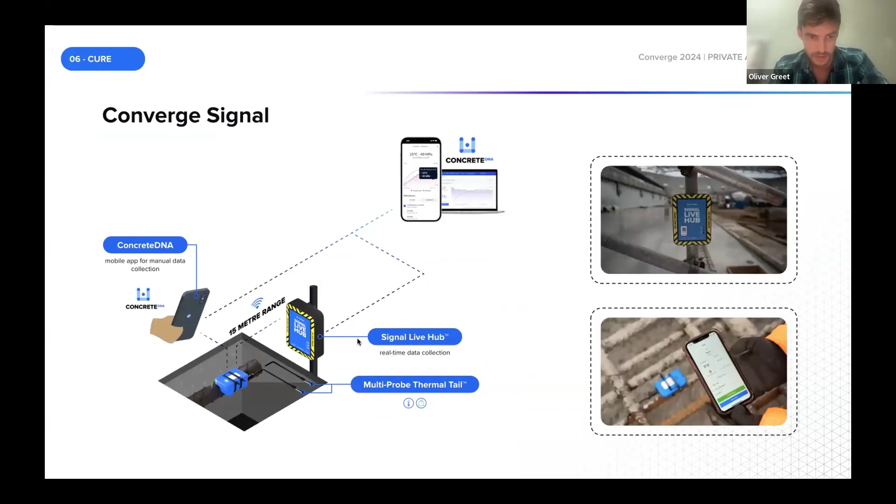I'll fly over these because we don't have much time, but we have a Bluetooth system, as well as a long range system we've recently developed. And also we have an AI system which is used to predict the exact times at which strengths are going to be obtained. So we're trying to bring this information as far forward in the process as possible.

So the maturity method itself allows contractors to understand the strength development in real time, and we're using data analytics to try and bring that information further forward in the process, so instead of reacting at the time that strengths are achieved, they can plan around the expected strength behavior of their concrete.

I've got a couple of case studies to fly through quickly, and then I'll probably wrap because we're conscious of time here. This is a project we worked with Careys and Multiplex in London. This is a 50-story tower with a very tight program, and you can see in the bottom right-hand corner their jump form, rising formwork system, where they were using us to track the strength gain.

As I say, it's a common use case where the strength gain of the concrete in situ essentially forms the rate limiting step and is considered time critical. So they used it in post-tension slabs as well as in their core system, and they attributed a day of saving per floor due to the elevated temperatures they observed and having access to real-time data. Over 50 stories, that accumulates a considerable time-saving potential.

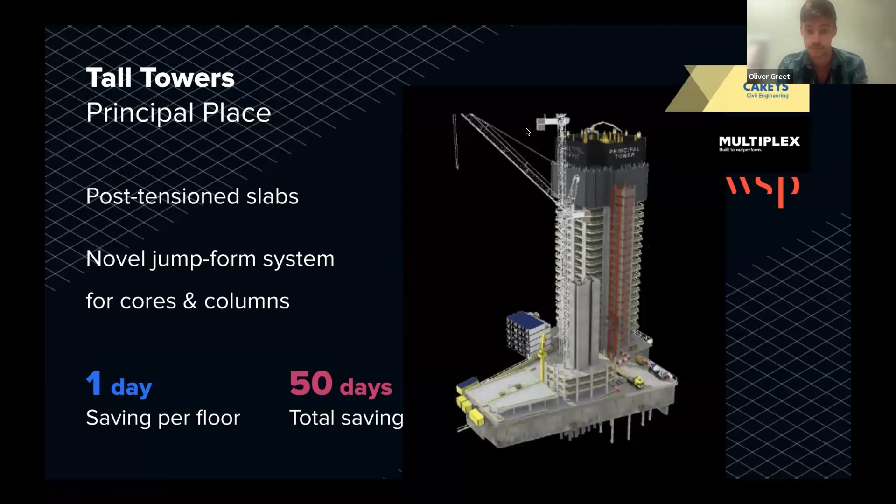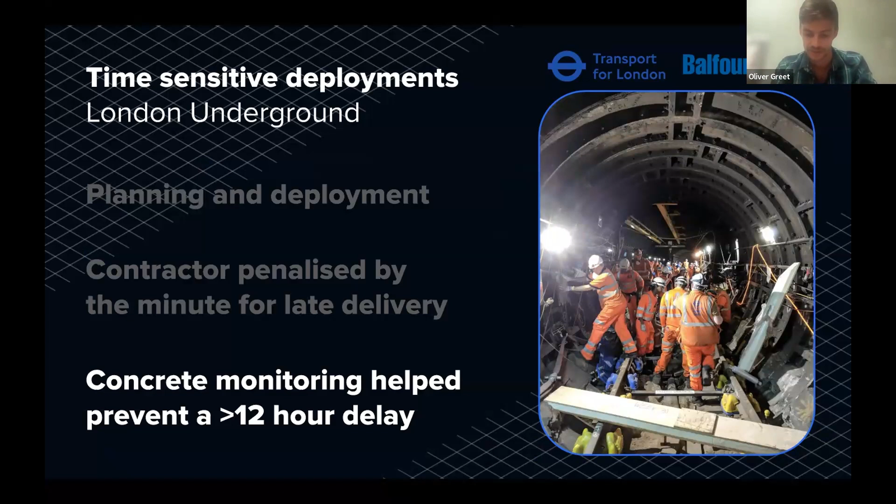I'll probably skip over this one because we're running short. Ultimately, the system is useful in a wide range of applications. Like I said, tall towers and things are usually our bread and butter, but we work on a lot of civils, and this is a case where we were helping the London Underground in some very time-critical repair works where they tear out the concrete and cast it in. Those tracks need to be operated again by Monday morning. Usually you get a 24-hour window, so again, very time-critical, and we saved over 12 hours there.

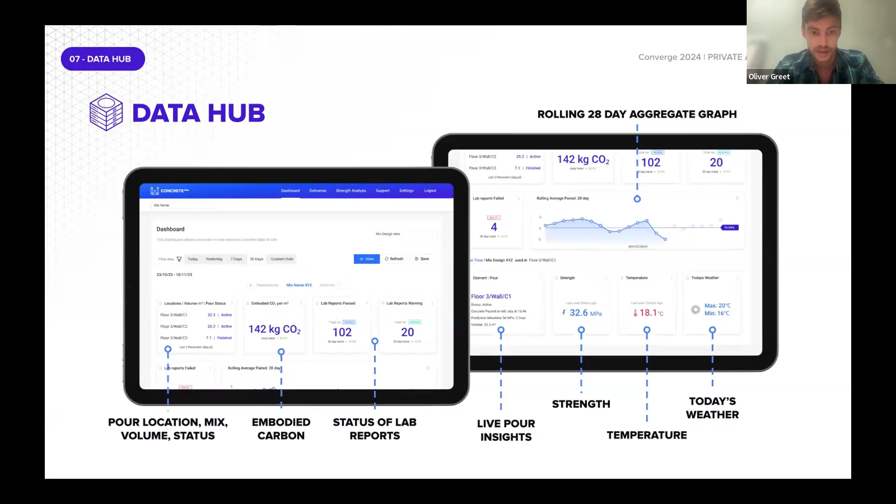Some quick mentions: we're developing a data system for concrete. This ultimately tracks the strength results of concrete, traditional cube measurements, and any deliveries of concrete to the site, as well as any QA data associated with the concrete being obtained on site, plus the embodied carbon. Happy to talk with more people about this afterwards if they're interested.

And then Mix AI is a system that we're currently developing, looking at predicting the performance of concrete ahead of time, and also looking at how we can adjust concrete mix designs to make them more optimal in terms of carbon and performance. So with that, I will yield the rest of my time. I think I've just about brought it in time. So thank you very much for listening, and I'm sure we can perhaps take any questions if we have any.